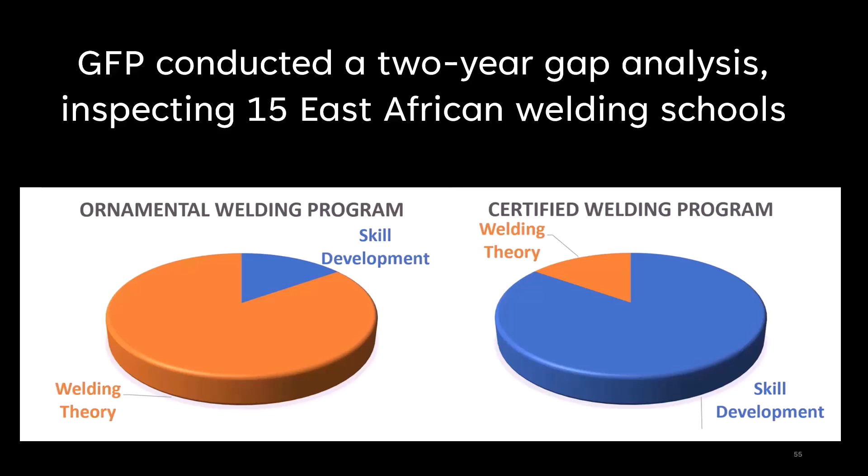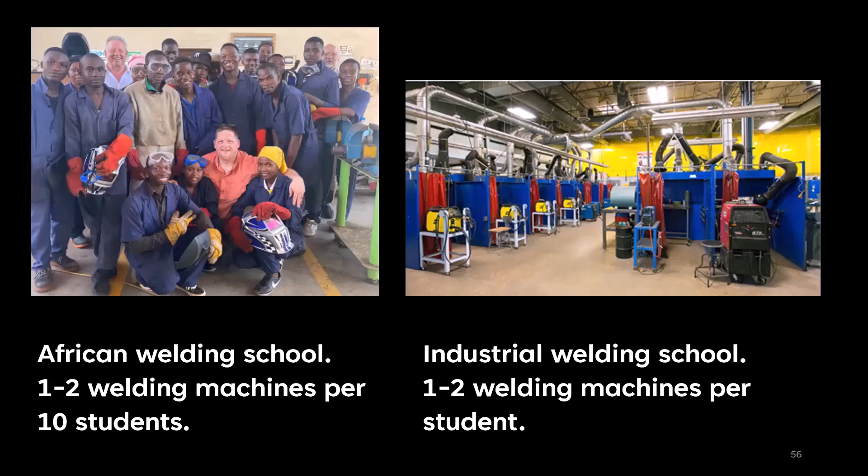We found in our study that the 15 welding schools we visited had between one or two welding machines per 10 students, as noted earlier, while modern welding schools have 1 to 2 welding machines per student, as shown on the right. Modern welding schools also have fully equipped fabrication shops where welders learn how to apply their skills in the industrial welding workplace, in particular fabrication skills. On average, the East African schools we visited only had about 25% of the fabrication equipment that fully equipped industrial welding schools have.

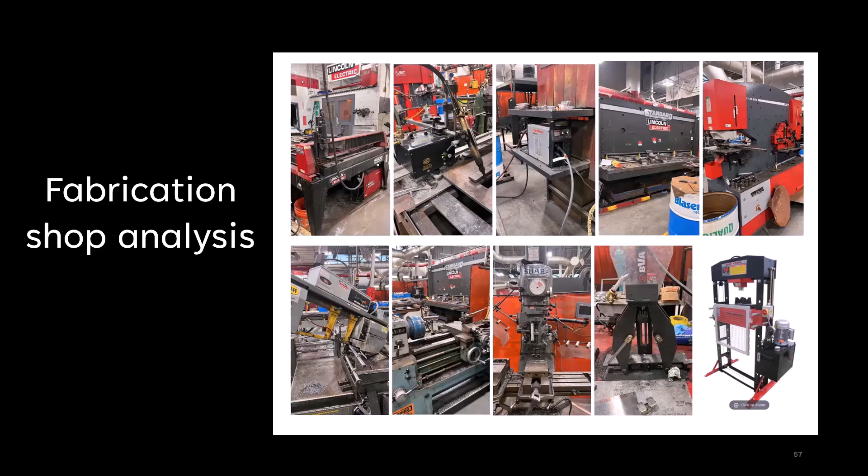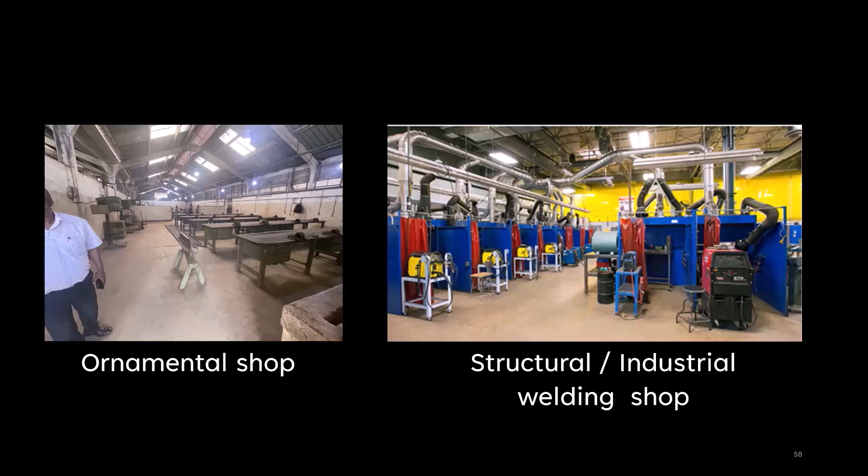The welding school at the left lacks welding booths, adequate lighting, proper ventilation, and sufficient shop equipment, and not enough welding machines to train industrial welders effectively. The school on the right is a school which produces certified welders in the U.S., with welding booths, ventilation, good lighting, and all the equipment needed.

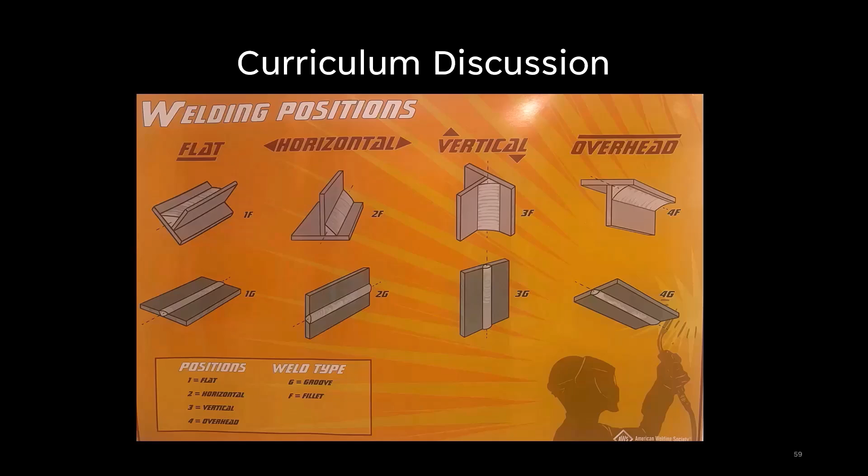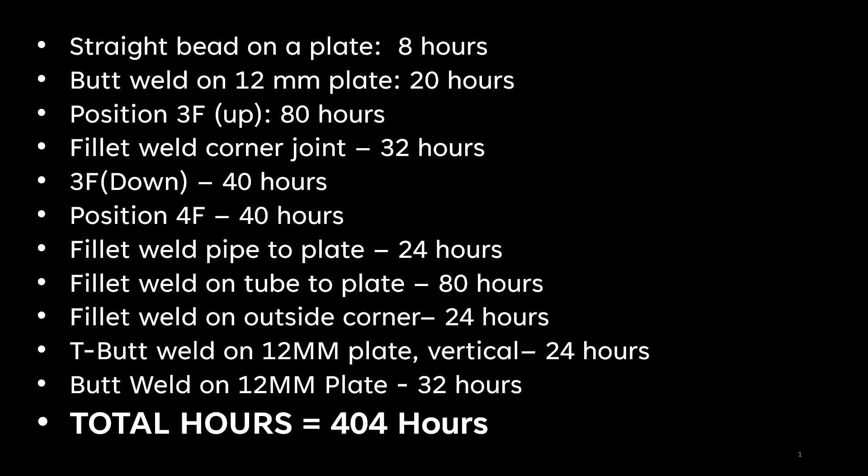Let's take a closer look at the problem that exists across sub-Saharan Africa welding schools. As you can see in this tabulation, the total number of actual welding skill practice hours is 404 hours for a 12-week course at a quality South African welding school that prepares students to pass internationally recognized certification tests. This means that the student spends 84% of his or her time during that 12 weeks in actual welding, and very little time on welding theory.

In contrast, this is a summary of the skill practice hours provided at a government-run welding school in East Africa. It includes a total of only 150 hours of skill practice training in stick welding over one entire year of school, and a total of 246 hours of skill practice over a full 3-year welding training program. This 3-year program only provides students with 246 total hours of skill practice versus 404 hours for a 12-week stick welding course that actually prepares students for certification.

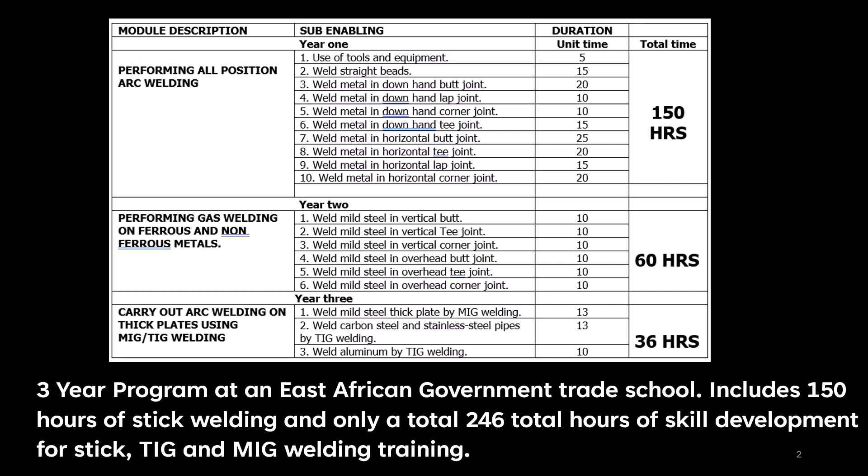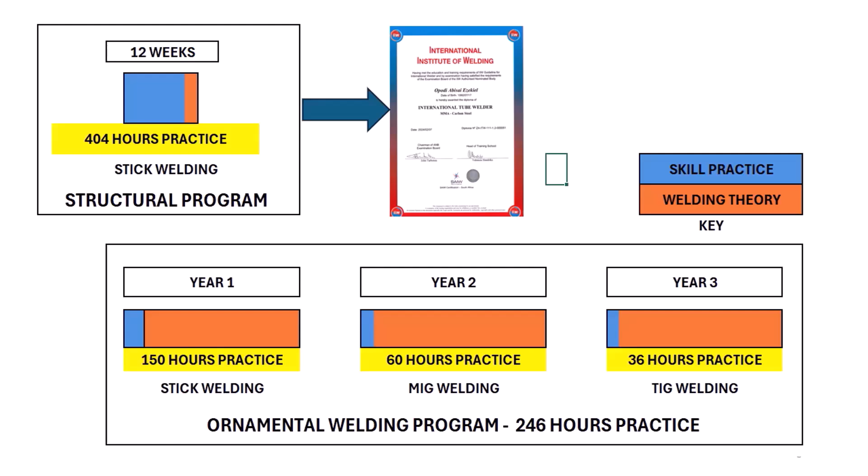As a construction executive, these are the kinds of skill certificates that I require from a welder before being allowed to work on any of my sites, and this is a standard practice across the industrial world based on my experience and observation. Certificates that meet the requirements of the American Welding Society or International Institute of Welding are the most common certificates that I've seen through my career. Without a doubt, the government welding school curriculum that I showed above does not prepare students to obtain these certificates.

However, I have talked with many African welders who mistakenly believe that if only they could have access to a testing center, they would be able to obtain these certificates and get good jobs. Sadly, this is flat wrong.

Rigidity in the government education ministries' curricula must change, and they must allow flexibility in the welding curricula applied at their schools. Unless and until this change occurs, governments are not only failing their students, but they are failing their industrial development efforts and industries who need welders with the certified skills that will meet global industry quality standards.

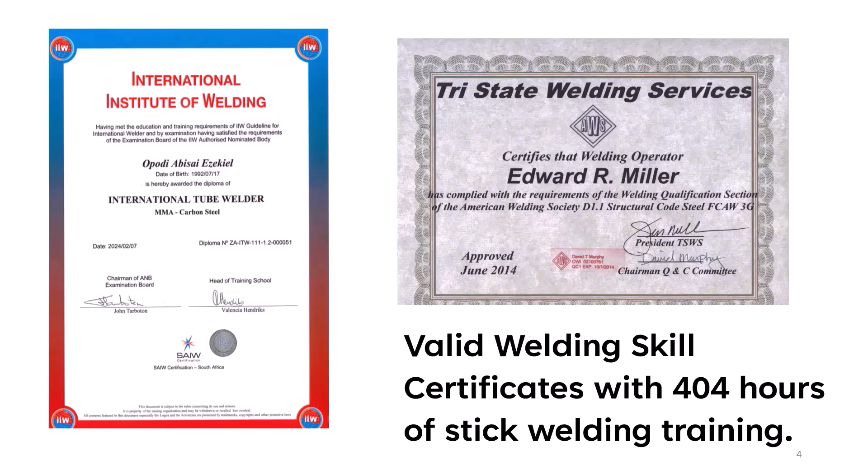As mentioned, we have anecdotal reports from the East African crude oil pipeline project that only about 2% of welders who applied for the project could meet the skills standards. We also note in recent reports in the Kenyan media that a major Mideast employer found that fewer than 5% of the Kenyans applying for skilled jobs met the requirements.

There are exceptions to this rule, such as local cottage industries in the African market, but if a student wants something equivalent to a global passport, recognized certification is the best way forward. I have shortened this discussion about certifications for the sake of simplicity, but there are other standards which govern welding work, such as the ISO 3834-2 standard and Section 9 of the ASME code, depending on the governing project specifications.

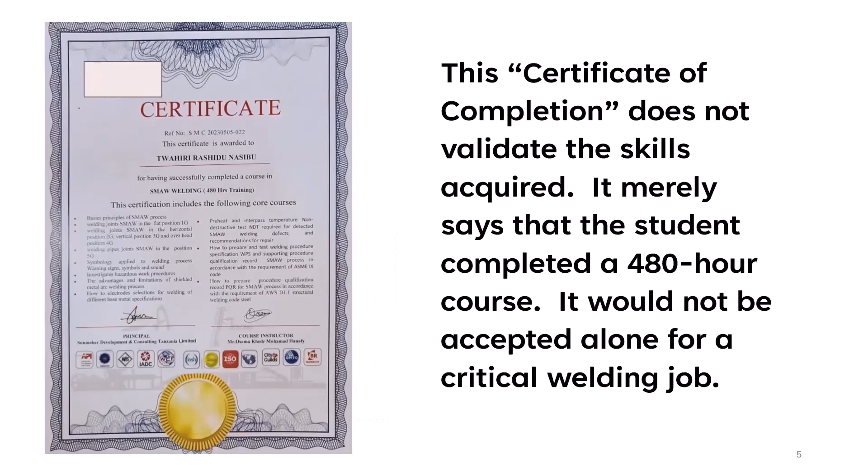My point is that training which focuses on skill development prepares the student for the world of work much better than the ornamental training described above. Industrial welding skills are a fundamental building block for a modern economy. It is one of the skills that cannot be learned as an apprentice. It requires months of dedicated practice while wearing a hood, peering through smoke glass, and working under the helpful eye of a trained instructor. The industries that are supported by industrial welding have a high job creation multiplier impact.

It costs money to train a welder, and I believe it's worth it. After decades of working in industry across many sectors and gaining a deep understanding of welding training in Africa, I believe that upgrading the welding training to world-class industrial standards will have more positive, leveraged impact than any possible human capital investment that can be made at this time in history. Both directly and indirectly, the economic development it will support could literally raise hundreds of millions of people from poverty and hunger. In practical terms, it will eliminate severe poverty on the continent.

More young parents will have a way to feed their kids so they don't go to bed hungry at night, and fewer moms will die from inhaling smoke from cooking fires. These are the dreams that I now embrace in my 7th decade on this planet. We are all dedicated to making Africa a better place for its youth and industry, with a parallel goal of ending poverty in 10 years.